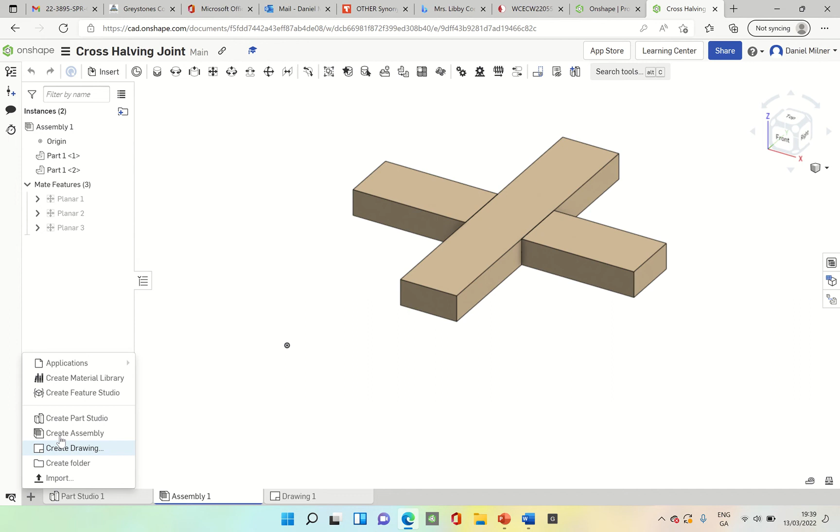In today's class, what we're going to do is construct a cross-halving joint as seen here on our screen in Onshape. So I'm going to redo this again. The first thing I'm going to do is go down to the plus at the very bottom left after opening up a new document called cross-halving joint. Our next thing is we're now going to click on Create Part Studio. And off we go.

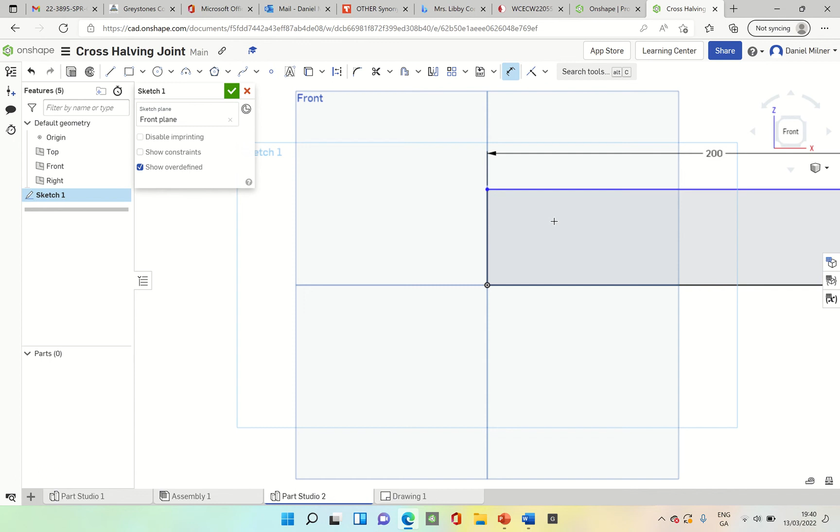Sketch in the front plane. Click front. Corner rectangle, start from the origin. Any size. Dimension the long side up on top to be 200, press F on your keypad. And its adjacent side 18.

Now we will extrude, and we want to go to new, switch direction, and an extrude of 40 millimeters. Right click, edit appearance, off we go. Next, what I'm going to do is take my insert out of my joint, my trench, in order for the whole joint to assemble.

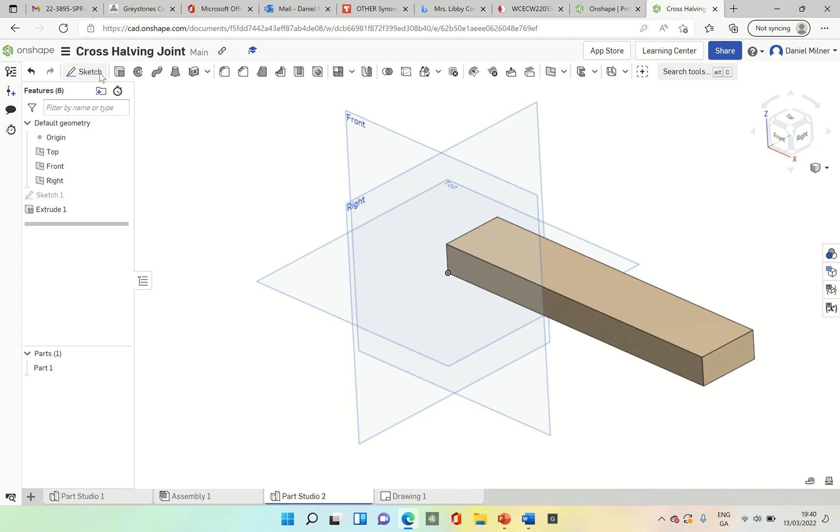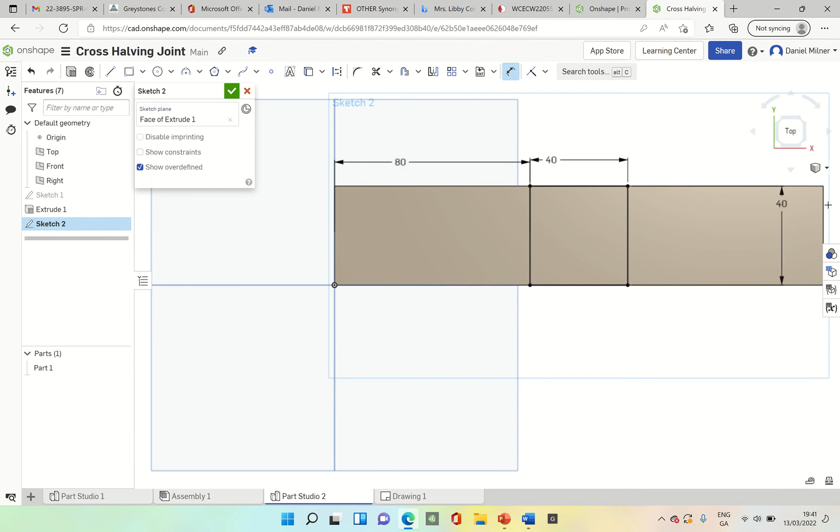Just gonna press top here so we can see it correctly. That distance is 40. This distance from here to here is 80. And 80 will be our remainder on our other side. Now we're going to go to extrude and remove this time. And we're going to go down halfway, which is 9 millimeters. Okay. So that's all we need to do.

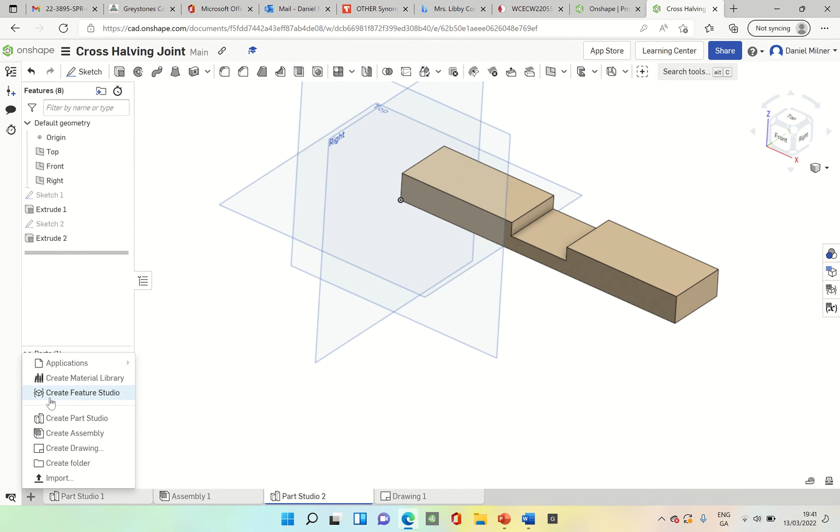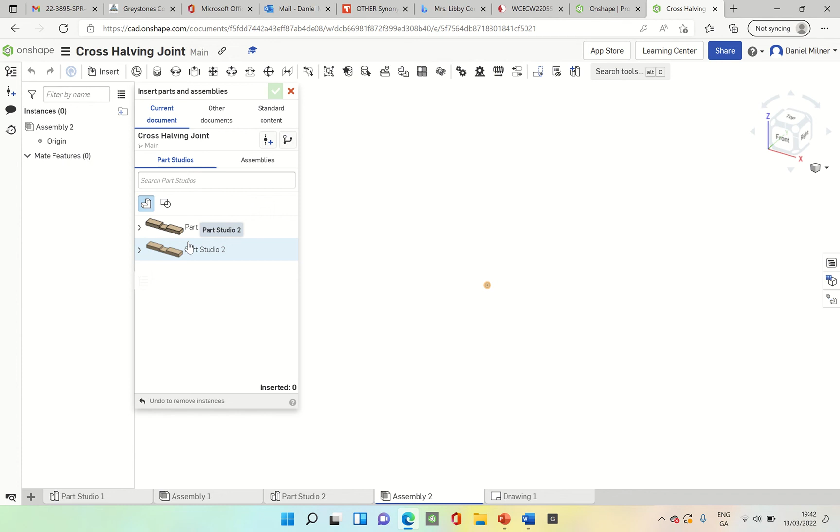Our next thing now is to go into an assembly. So I'm just going to go down to the bottom left here again, and I'm going to go to create assembly. My next step now is to insert the part that I've just made. We do that by going over here. I have two parts here because I already have one made. If I didn't have one made already, there would be just one part here.

So I'm just going to bring in my second part, which is here, and bring that in like that. I can press F on my keypad to fit it in, and just zoom out. Again, we'll bring in part 2 because they're the exact same, and we'll just leave it down like that and press correct. What we want to do here is assemble these, but first we need to orientate one of these in the correct orientation in order for our joint to assemble.

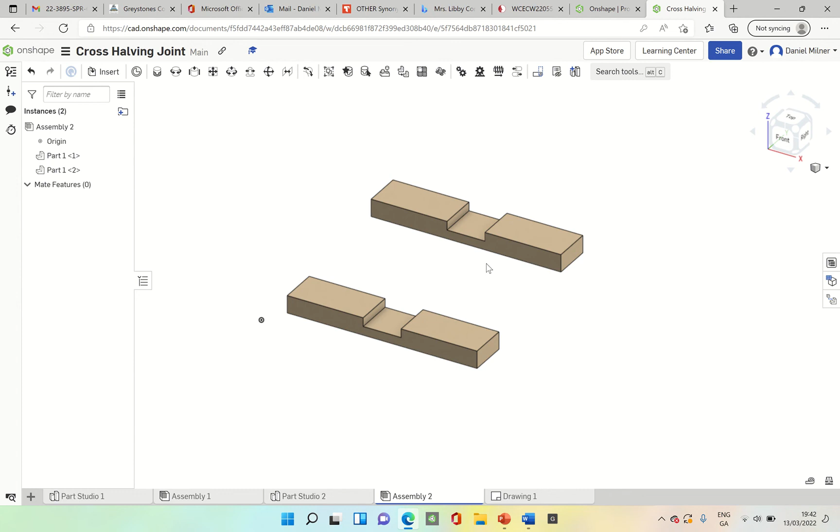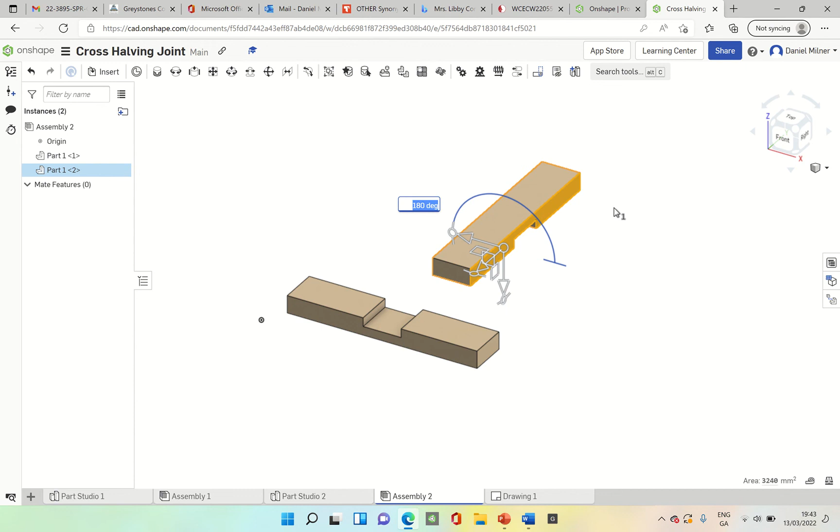To do this, I'm simply going to left click on one of my pieces, and I've got 3 triads here. These triads will allow me to move my piece in whatever direction I want. As you can see here, this will turn around this way, and I can put in 90 degrees. Just type in 90 and enter. The next thing I need to do is rotate it this way. So catch that ball and move it, and it's actually rotating an angle of 180. Just type in 180 and press enter. And there we have it. To get rid of this, just left click outside, anywhere.

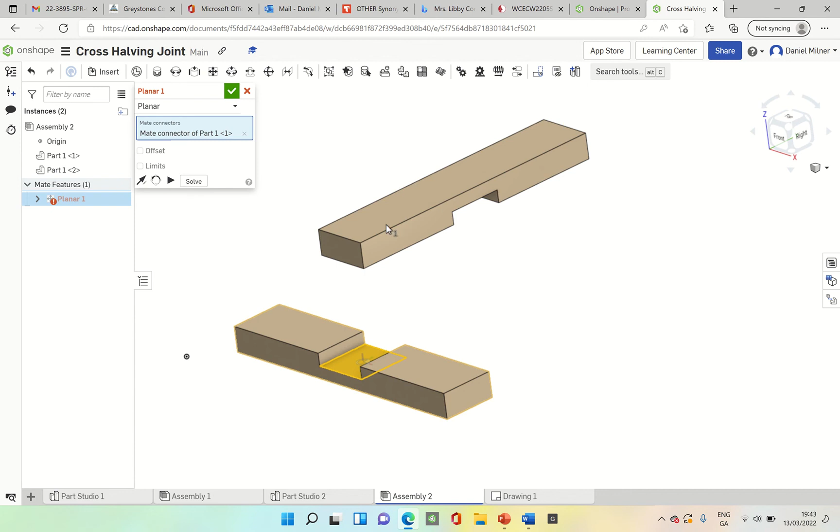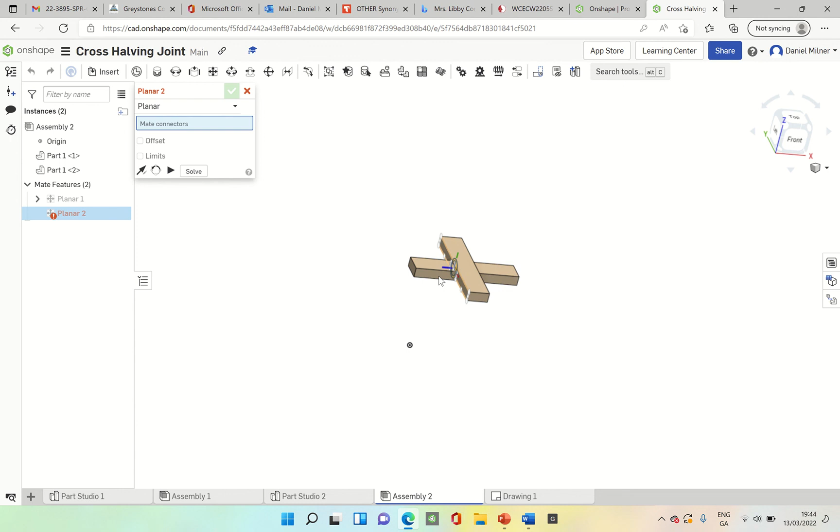Now we need to mate these two pieces. I'm simply going to click on a planar mate up here. I'm going to left click and off we go. I'm going to left click on that bullseye. No, before I do that, I'm going to line up 2 sides, and these 2 sides are here and here. So it's this face. The bullseye for that face is there. Press correct. Now we can still pull these apart. They still are not mated yet. So we have those two sides flush.

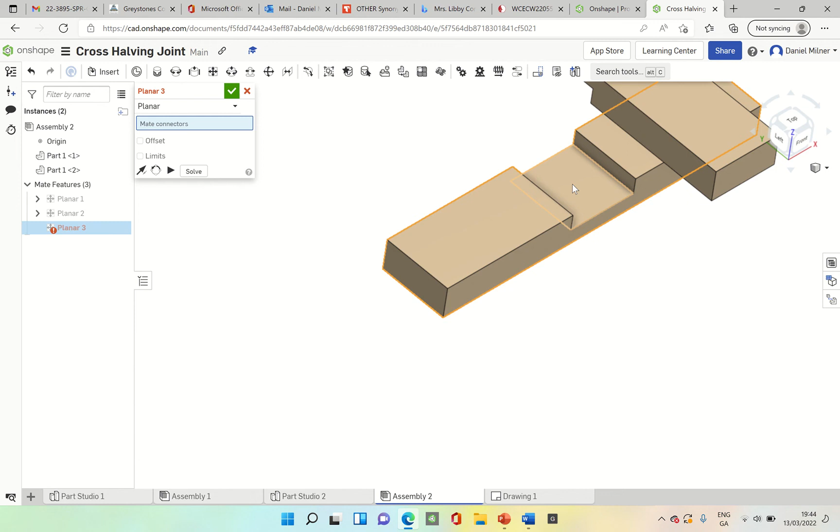The next thing we can do is link that face and that face. And lastly, all we need to do now is left click here and left click on its corresponding face and press correct. That's our cross-halving joint assembled.

As you can see, it took a couple of mates to assemble that cross-halving joint, but we did have to orientate one of the pieces a couple of ways before we started any mating. So just be wary about that in future.

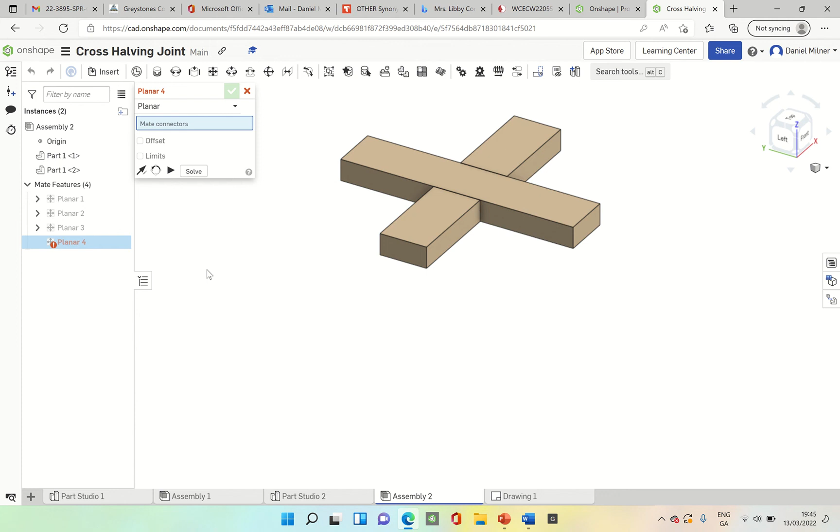Our next step is to create a nice simple drawing, something like this. This is the drawing that I have already created. That's what we want to do here, and I'm going to take you through that quite quickly. How do we do that? Go down to the left hand side here and go to create drawing. Custom template, do not include and do not include. This is an A4 size, size A as you can see. And okay.

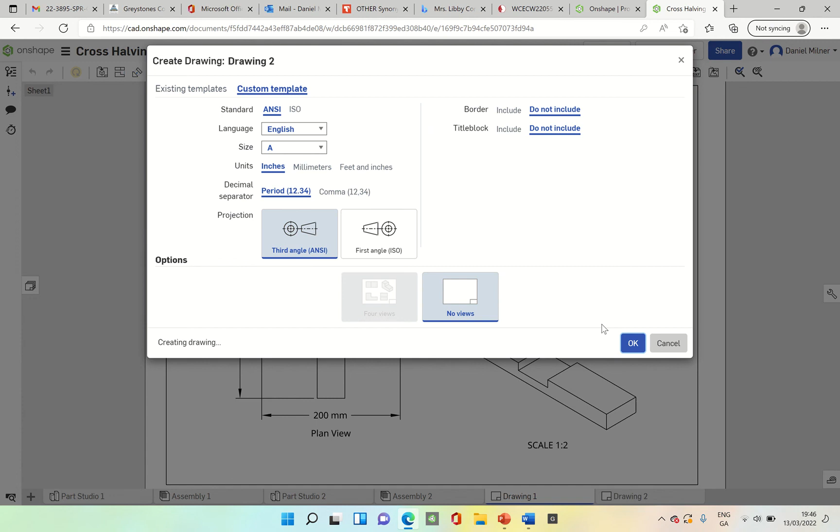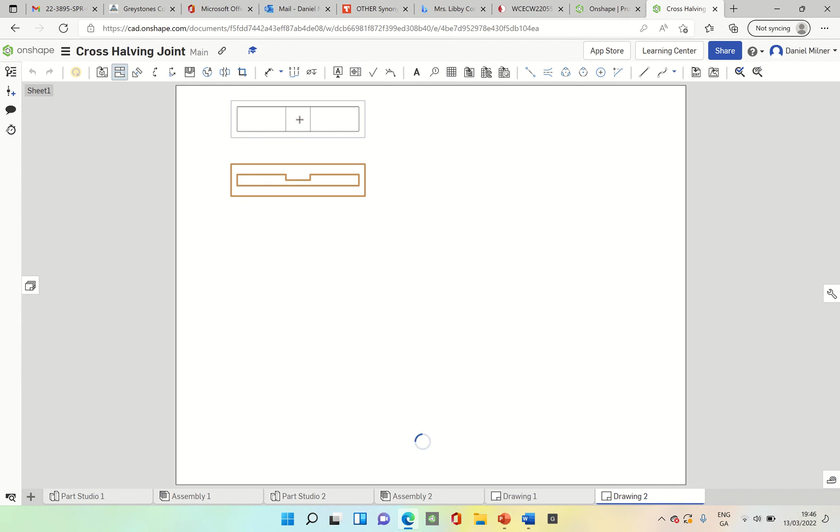Okay, so what we'll do is bring in part 2. Okay, drop it here and just go down. And that is, okay, one of the plan views that we will see. If I go up, that's another plan view that I will see. So I like to capture that plan view because I think there's a bit more detail in it. So I'm going to go with that one.

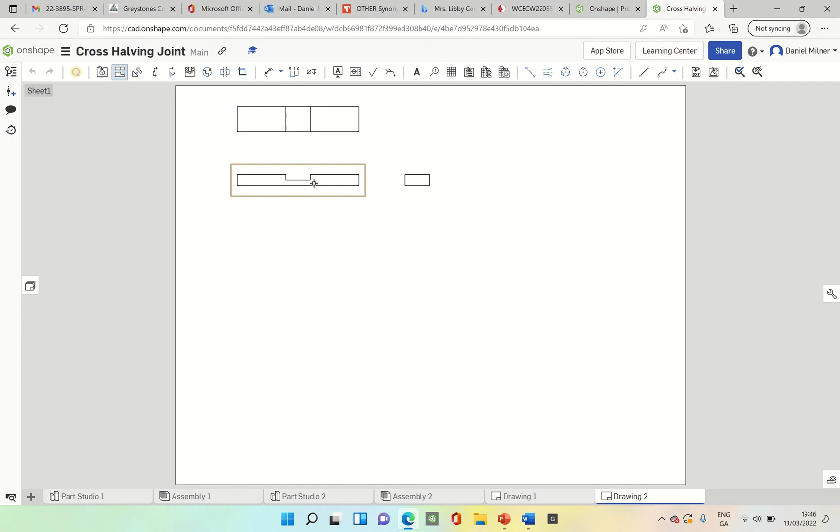So I'm just going to left click on my elevation and move to the right, and I should get the end view. I'm going to click on my elevation again and I'm going to go 45 degrees down this way and see what do I get. Okay, so I got that. Not really that great of a view. I think this is a lot better. So I'm going to go with that. So there are my 3 views established.

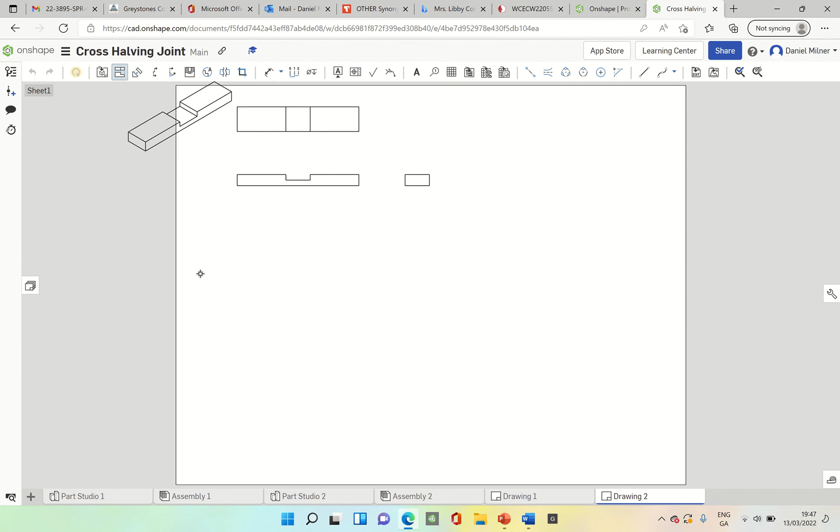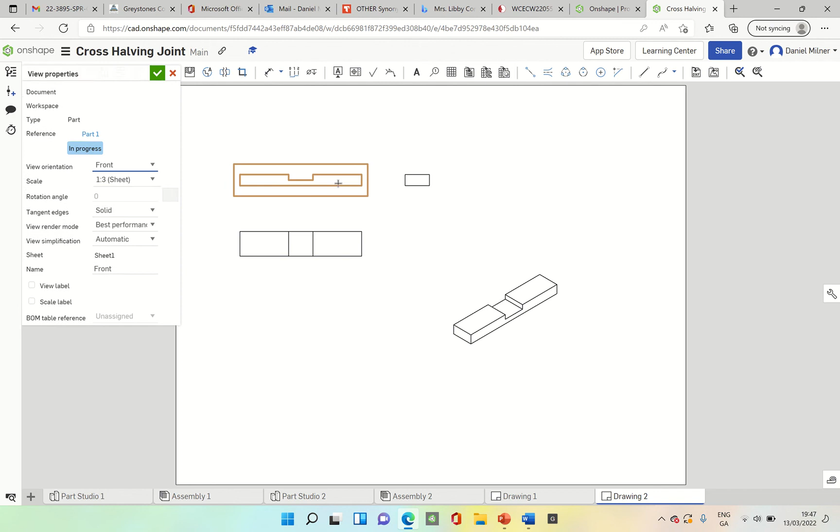Now what I'm going to do is I'm going to move them and change their scale. So I'm just going to drag that, roughly, no, press escape. Okay, so just catch it and move. Catch this, I'm going to move that below it. I'd like for these to be a bit bigger, so I'm just going to double left click. This is a scale of 1 to 3, we're going to go 1 to 2. Okay, it's a bit bigger. Move out my end view. Right, press correct here.

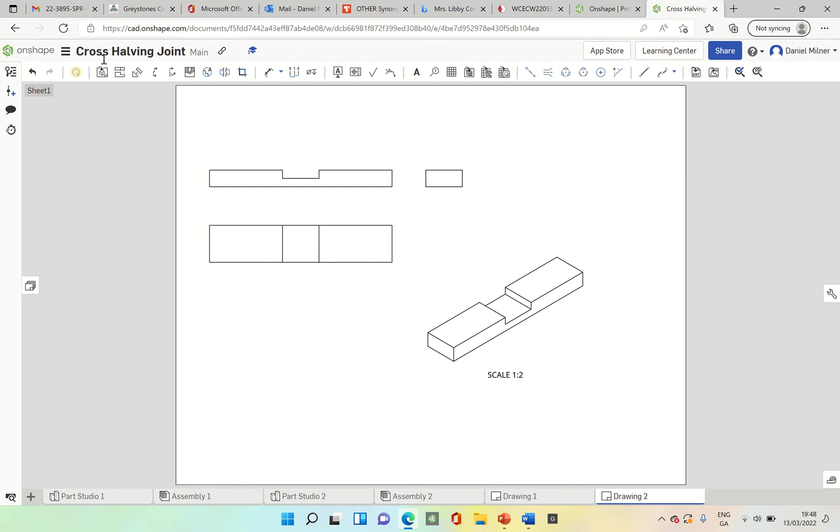Now, so we'll delete this. And my next thing I want to do is bring in another view and just see what we have. And go to assemblies. Okay, so I've got 2 assemblies here in this document, as you know. My first assembly was the one that I already pre-made. Our second assembly, which I just made very shortly ago, that's generating a preview there. So if you wanted, you could just click on that. Okay, so that's the assembly.

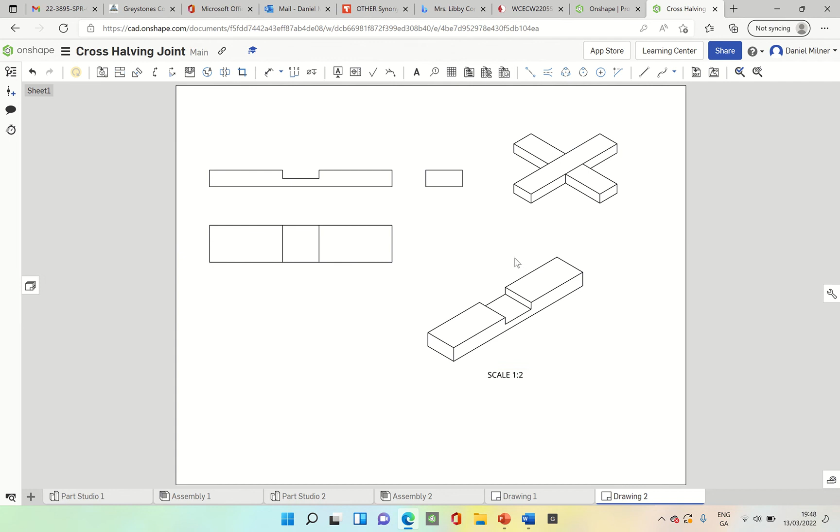What I'm going to do here is go to view orientation and isometric. So I want an isometric view of this, and that should be there. Okay, so that's quite nice. So I'll move this view here, and I'll change the scale on that to make it a bit bigger. 1 to 2. That should be good. Just press correct and delete that scale.

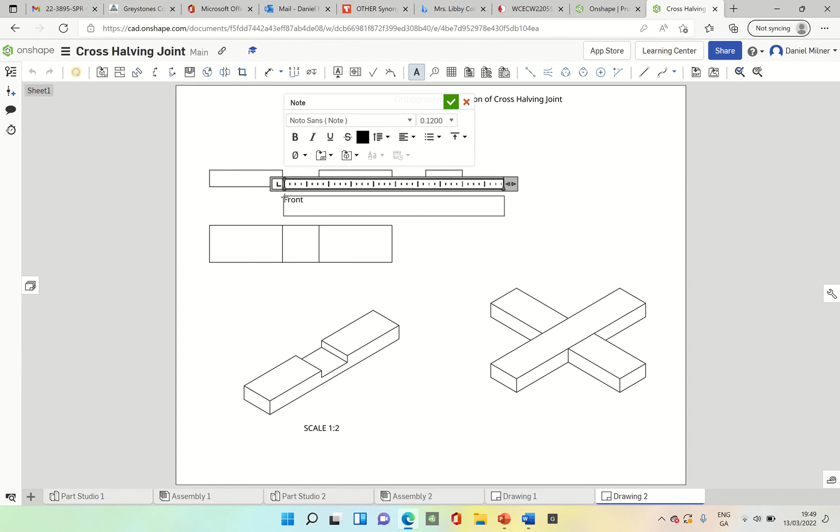Okay, so we're going to insert a note. This is very simply cross-halving joint, and I'll pull it out. So I've got my 3 labels put in for my front elevation, my plan view, and my end elevation. I'm going to delete this, and we'll add in some more notes.

Sorry, here. This is an isometric view of one part. Okay, so we're just going to say isometric view of cross-halving joint, I suppose. And I'll make that a bit thinner. Okay, press correct.

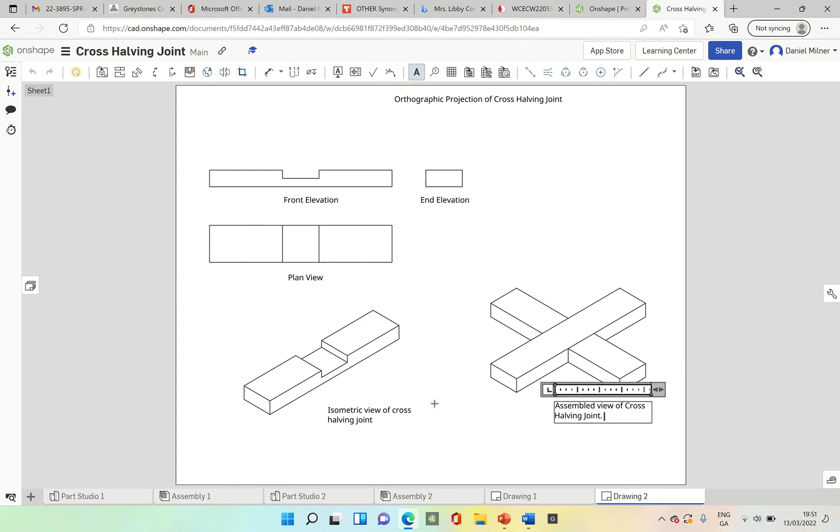Computer's a small bit glitchy, apologies.

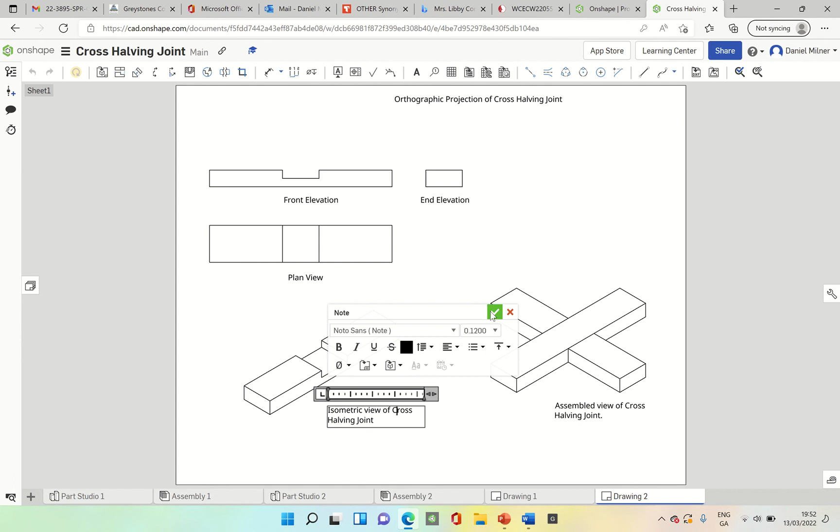And we're nearly finished. We're just going to add a few dimensions onto our drawing. Okay, so before we do this, we might just space out our views. It's always nice to just have a bit of room. Okay. Our dimension is up on top here.

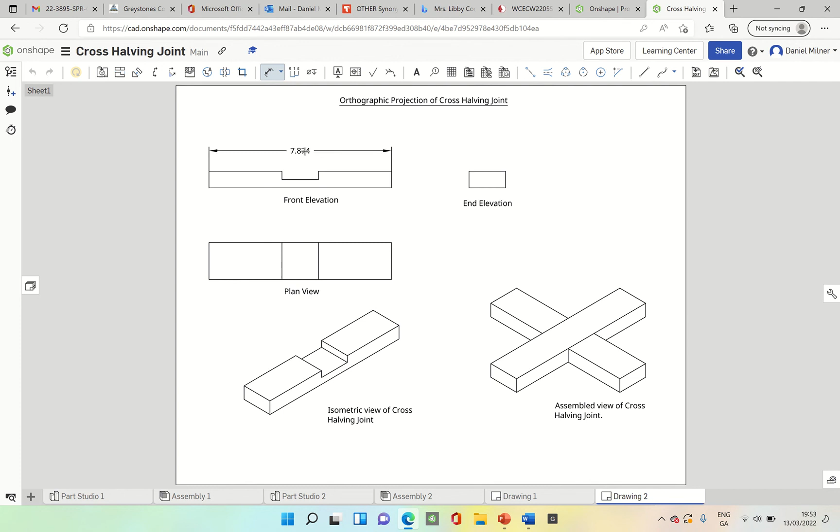So the first thing we're going to do is go with the overall dimension, which is here. They're all in inches, which is imperial. We'll change those later on. Just going to do all of it as one and then change everything. Just try and have our dimensions at the same height as our neighbouring labelling. So that's pretty much everything. We just need to go with the depth of that. And that's quite good there.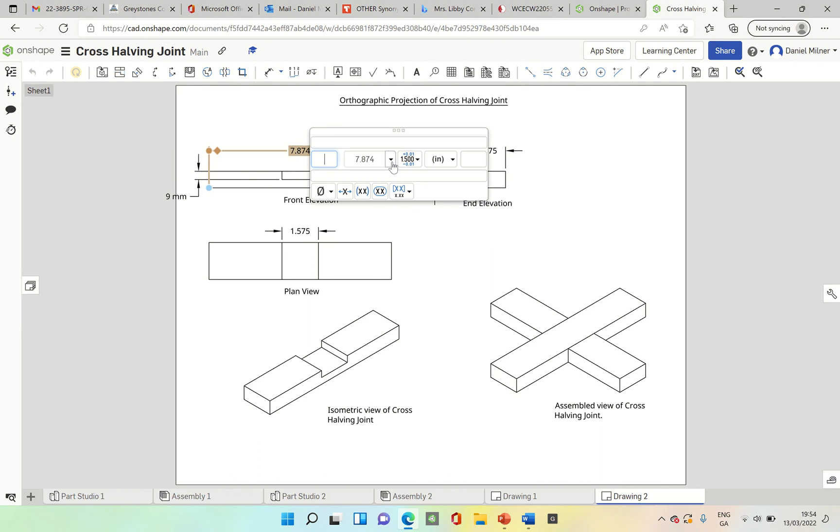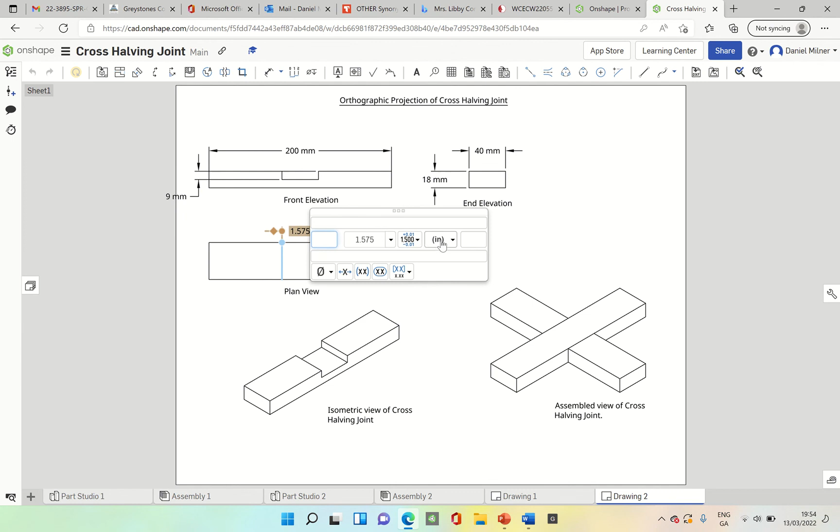So let's change everything now into millimeters. And we don't want any decimal points. So just click out here. So one thing that I've learned here is if you just go down and click one of these diamonds, you'll see that the arrow moves to the right hand side. Okay, it's quite handy. That's about everything, I think.

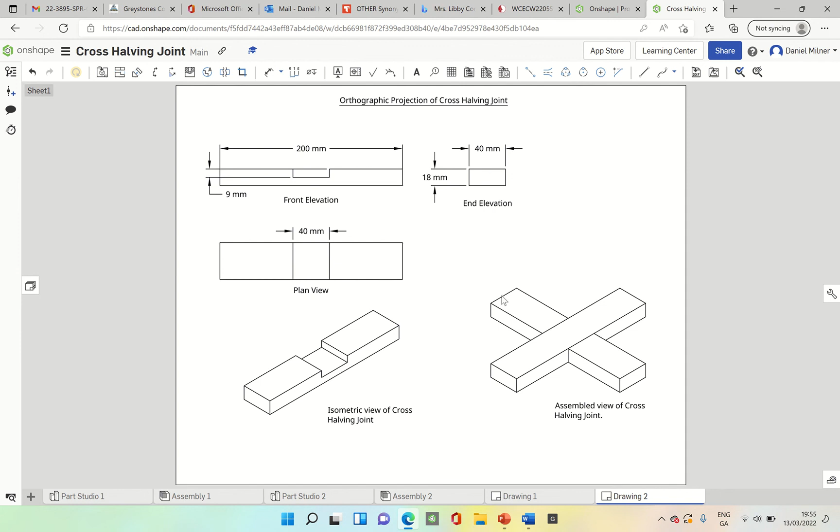So I might just move this view over to the right a small little bit, and the rest then should follow. Okay, plan view, front elevation, end elevation. Okay, so that's it. Obviously, this is self-saving software, so we don't have to save it. That's your assembly, and that's our drawing that we've just done. Thank you.